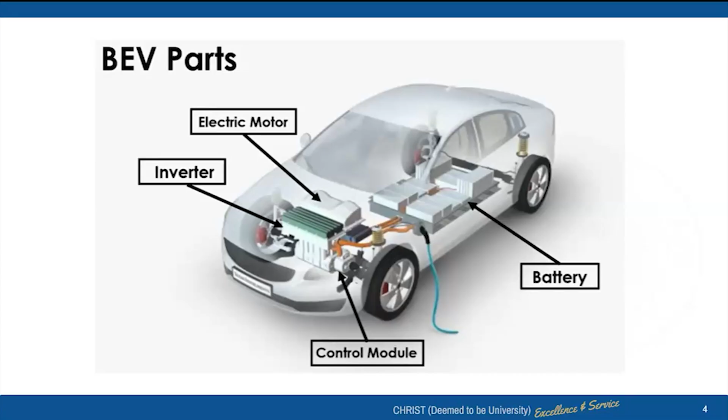Talking about the features of this normal battery electric vehicle: there is no emission, we don't depend upon any oil, it's very cost effective, low maintenance, reduced noise pollution, and very easy to drive as well.

Talking about some problems we could encounter: the recharging point scarcity, definitely, since it's newly into the market, especially in the India market. Obviously charging points need to be set up—that's one concern, though it is being installed at many places and is happening. The driving range is also less, going up to about 300 to 400 kilometers per charge, which is the maximum we know of.

The speed also has a limitation. But regarding pickup—when we talk about a petrol or diesel engine, initial pickup happens within seconds, whereas electric vehicles are much better, moving in just milliseconds. Another disadvantage is it takes a longer recharge time, and the price is also very high. So these are the vague problems we are facing right now.

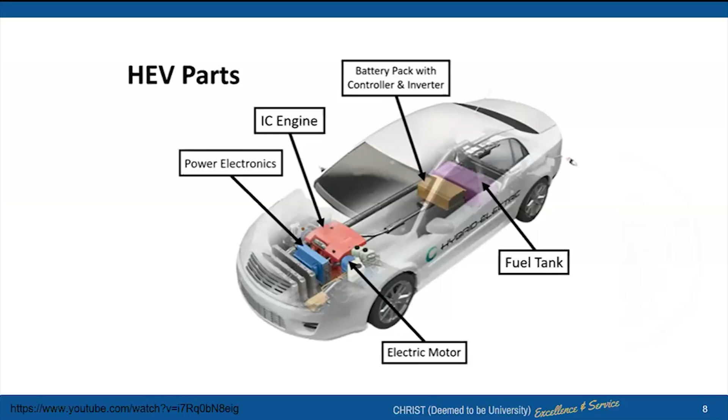So the basic components of this hybrid electric vehicle: it consists of your IC engine. You have power electronics, which maintains all the electronic signals to all the different components of the vehicle. You have a battery pack with a controller as well as the inverter, which is required to convert your AC to DC or DC to AC, and then you have the fuel tank also. So once you drain your electric power, you can go for the fuel tank, or you can have both used together, so that the efficiency could be increased.

So let us talk about the features. It is very environmentally friendly, and a regenerative braking system is there. That means whenever you apply the brake, it regenerates the energy in the form of charge, which can be stored into your battery. And there's assistance from the electric motor. It has larger ranges compared to the other vehicles, and it has a higher resale value because it consists of both components, the fuel tank as well as the electric part.

The problems that you could encounter with the hybrid electric vehicle are less power because it's a hybrid mode, it's going to be very expensive, and poor handling could happen. And even for the first version, where you don't have this hybrid part, the battery replacement is basically the actual cost of the vehicle, so replacement will definitely be very costly.

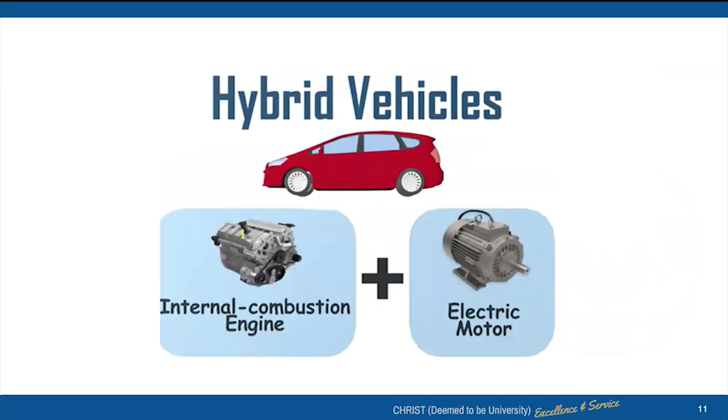So let us elaborate a little more about this hybrid vehicle. It has two parts. One is the internal combustion engine, and the second part is your electric motor. So in total, there are five components, as you can see in the diagram. You have an engine, a transmission gearbox, the generator motor, and a power control module which has the inverter as well as the converter.

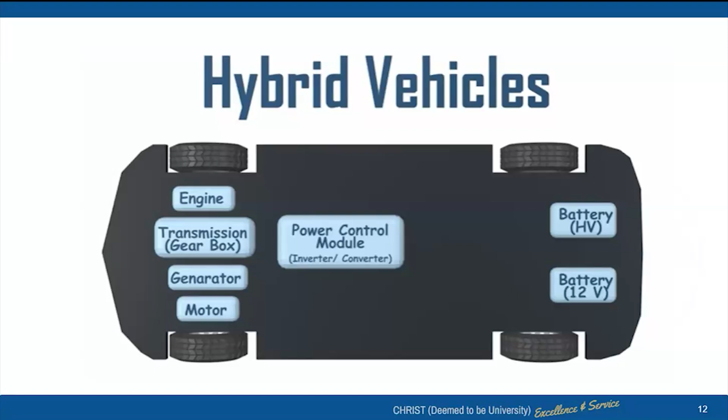And on the right side, you can see a high volt battery and a low voltage, that is a 12-volt battery. The high volt battery is basically where you store the charges, and this 12-volt battery is for supplying electricity to the smaller accessory parts of your car, not to the motor.

So if we divide this hybrid electric vehicle, we can run it through three different methods. One is the series hybrid method, the second is the parallel hybrid, and the third is series-parallel, that is the combination of these two. So let us talk one by one.

So the basic concept of this hybrid electric vehicle is you have an internal combustion engine, usually a smaller diesel or gasoline engine. By making use of the fuel, it generates the power. And with that power, the electric motor will be running. The electric motor provides the power, and it is known as the permanent magnet synchronous motor, an AC motor. It provides instant torque for smooth acceleration, and it also assists the engine.

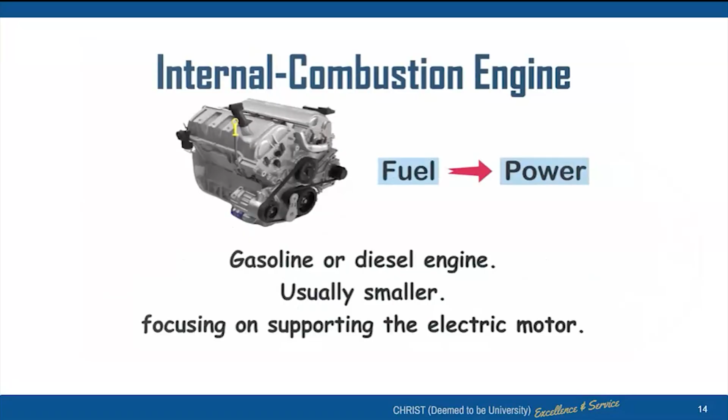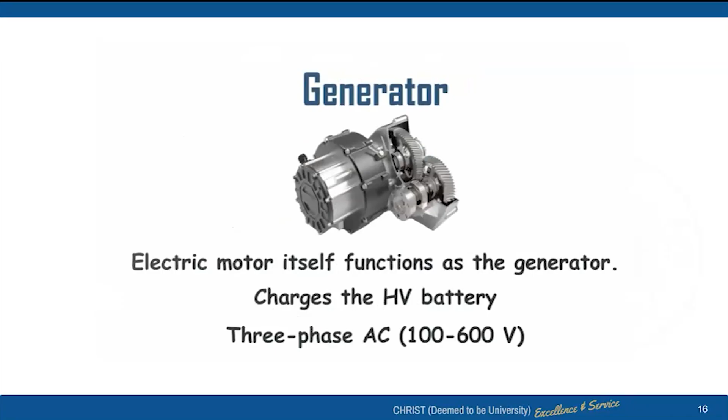So the internal combustion engine, as stated, does the role of generating the power from the fuel, and the electric motor generates the power from the battery. So here we have a generator. The electric motor functions as a generator. The charges are stored, as I mentioned, in the high volt battery, and it is three phase, and it can store charges up to, say, 100 to 600 volts.

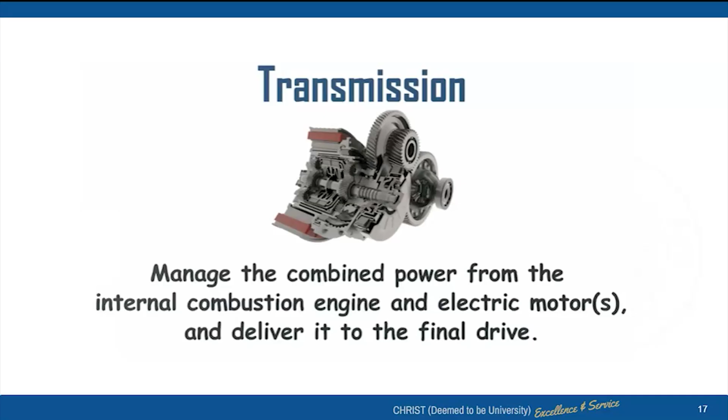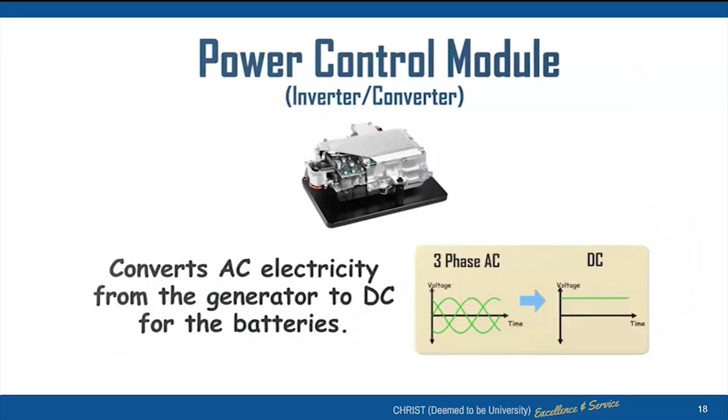And transmission is the process by which the power generated either from the fuel or the electric motor gets passed to your final drive. So it's a combined power from the internal combustion engine and the electric motor. And as we have seen in the diagram, the power control acts as an inverter or a converter. It's three phase, and it converts the AC electricity from the generator to DC, and that is for the battery.

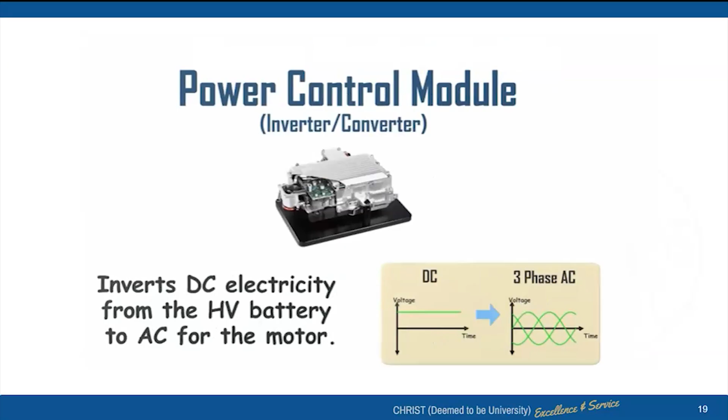And inverts the DC electricity from the HV batteries, that is your storage battery, to AC for the motor. So if you look at this, the power control module actively manages the power flow, and it controls both your engine as well as your motor together. And as I stated already, the 12 volt auxiliary battery is for lights, radios, and starting, and it is not at all involved in the main hybrid powertrain.

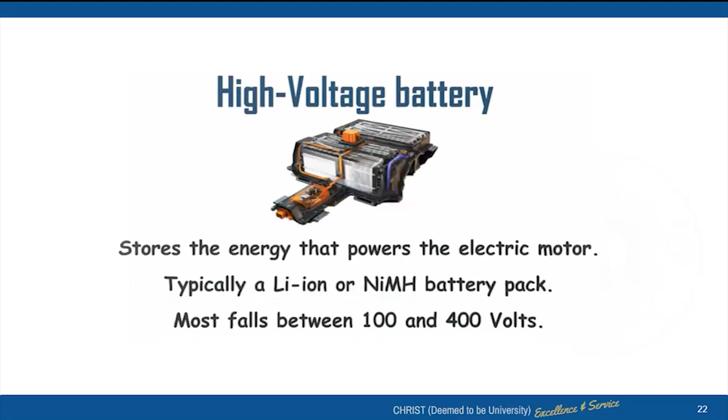And as mentioned, the high voltage battery is the storage unit, and it is typically a Li-ion or NiMH battery package. So a hybrid vehicle, which is a series, a parallel, or a series parallel, gives power to a vehicle to move in a different way.

So if you see the series, it involves the engine to supply the power to the motor, and then from the motor it is supplied to the transmission unit, that is to the gearbox, to drive the vehicle. And when we talk about the parallel, the engine and motor together supply their power to the transmission unit so the vehicle can move or drive. And the last one, which is a series parallel, you have the engine and motor together providing the power, but it is in the split way.

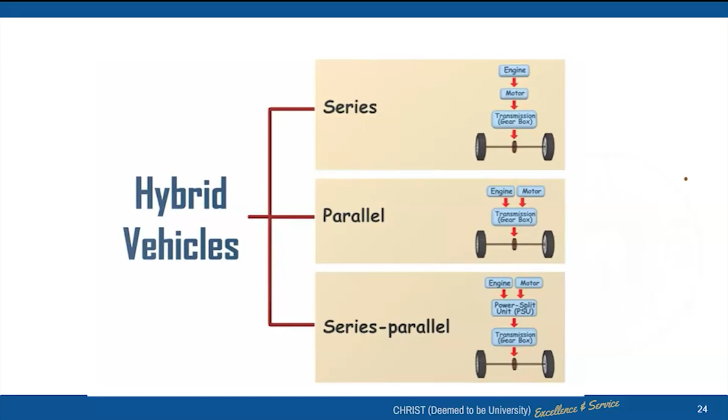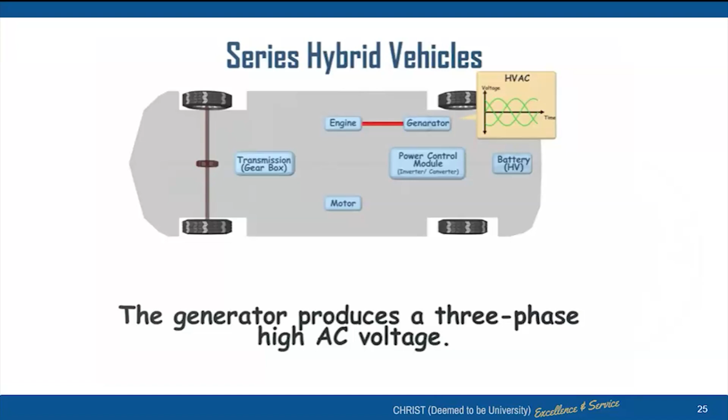So if you want to switch from one mode to another mode, from engine to motor or from motor to engine, it is possible in the series parallel hybrid vehicle. So looking a little more in depth at what is a series hybrid vehicle, you can see from the engine, the power is moving to your generator. The generator generates the power. So the generator produces a three-phase high AC voltage, and that is passed to your power control module, and from there it goes to your high voltage battery.

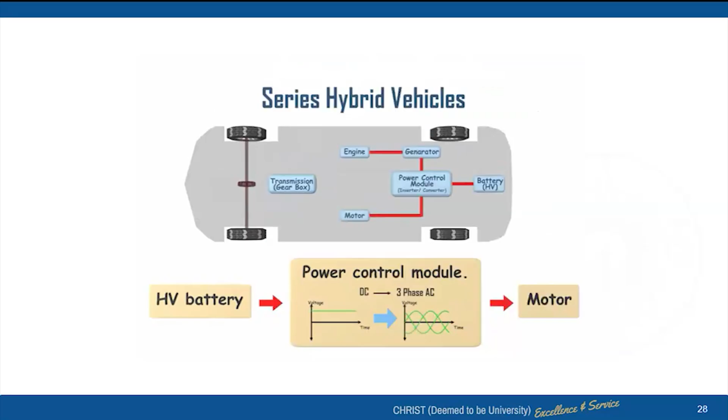And here you have the storage of your charges in the battery, both the batteries, auxiliary as well as HV batteries. Now once you have the charges in the HV battery, from the HV battery the DC goes to your power control unit. So the DC is converted into a three-phase AC, and from there it goes to your motor. Once it reaches the motor, it goes to your transmission unit, and from the transmission unit it goes to the drive, and your vehicle starts moving. So this is the simple fundamental method by which a series hybrid vehicle works.

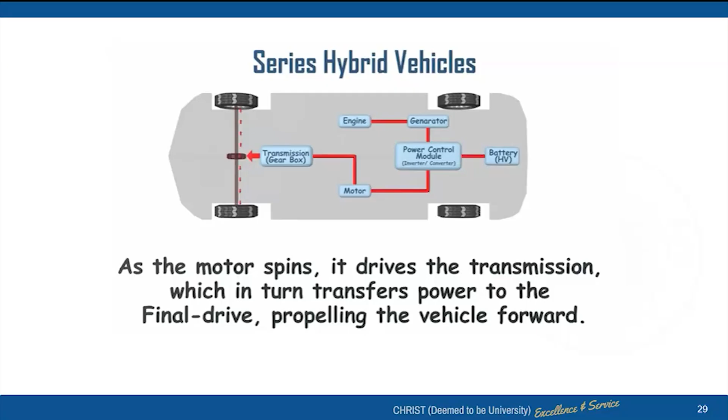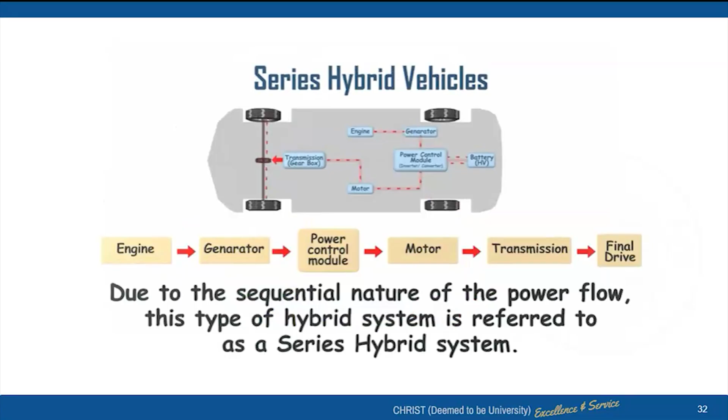So engine to generator, generator to power control, then to battery, battery to power controller, because you have an inverter and converter in the power control module. And then from there it goes to the motor, from the motor to the transmission unit, and finally it drives. So as you can see, it's a series transmission of power from the engine to your transmission unit. So, due to the sequential nature of the power flow, this type of hybrid system is referred to as a series hybrid system. Now, talking about the next one, which is known as a parallel hybrid vehicle.

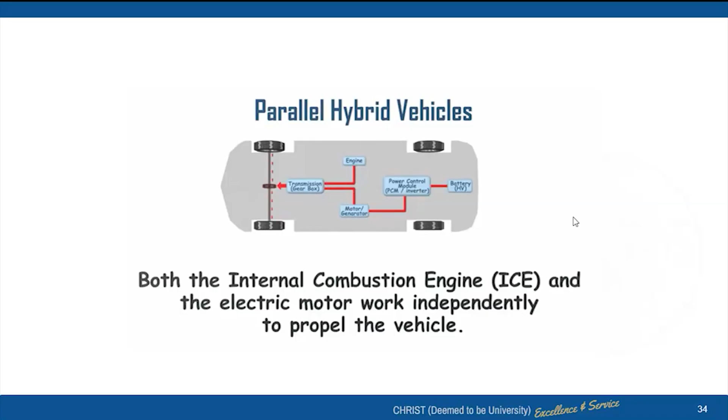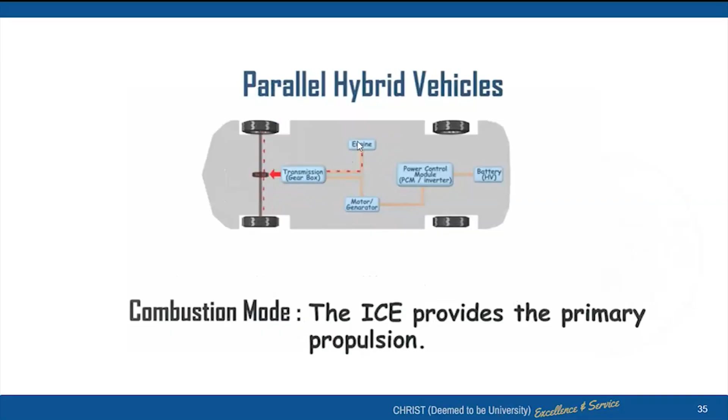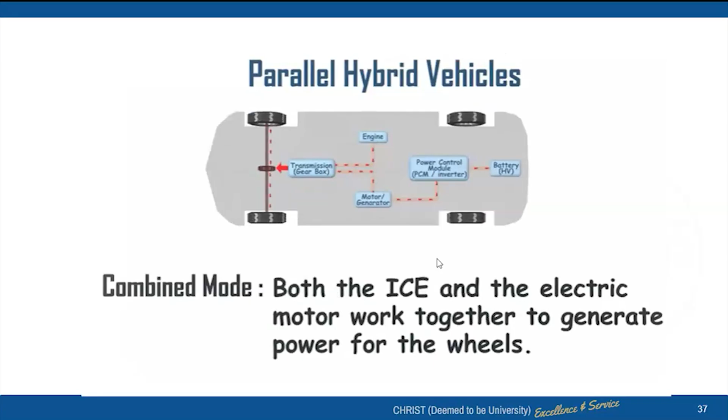Now, it has got three modes. One is the combustion mode, where the engine, the ICE, provides the primary propulsion. Then you can see the electric mode, where the vehicle operates solely on electric power. And you can see the combined mode also in a parallel hybrid vehicle, wherein both the IC engine as well as the battery come together to drive the vehicle. So the engine typically serves as the primary means of propulsion, and the electric motor acts as a backup. So once you don't have the fuel, then we make use of the battery to run the vehicle.

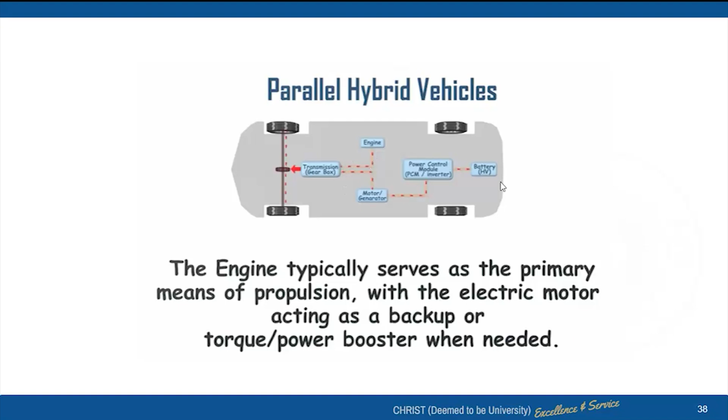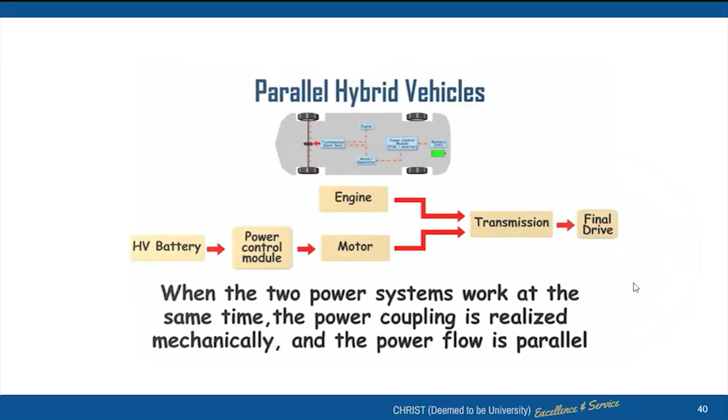Okay, now why is it known as parallel? I think it is clear to everyone that we are making use of both the engine as well as the motor. The motor makes use of the battery, and the engine makes use of the fuel, and together they transmit power to the transmission unit, and the final drive happens. That is why it is known as a parallel hybrid vehicle.

Now, talking about the series-parallel hybrid vehicle, here the engine has the capacity to transfer the output power directly to the transmission through the power split. So what is this power split? Whatever power you get from the engine, and whatever power you get from the high-voltage battery, these two are transmitted in a ratio, in a split, so as to make it more efficient.

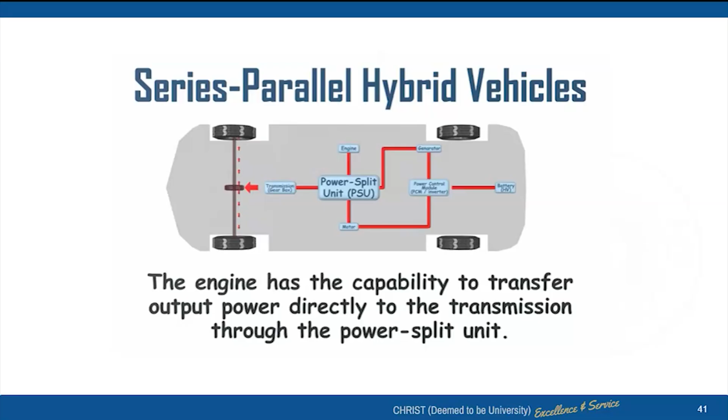You know? So it is not like you are going to use the engine full time, or that the motor is used full time. Actually, we try to make it energy efficient, and try to see if we could utilize the battery more compared to the engine, so as to make it environment friendly also.

The mechanical path directly connects the engine to the transmission. The electric path transfers the power from the electric motor to the transmission. And during operation, this happens dynamically. So here comes the concept of embedding your code or software into the power split unit, so that it can dynamically adjust the power.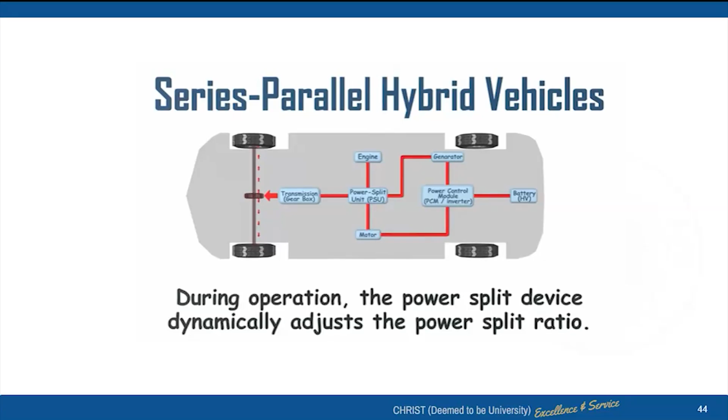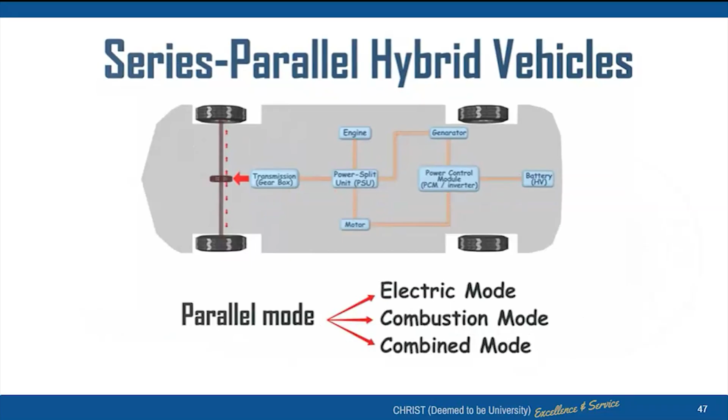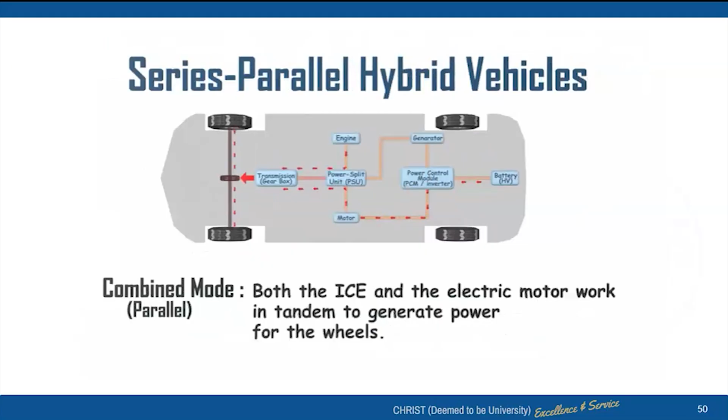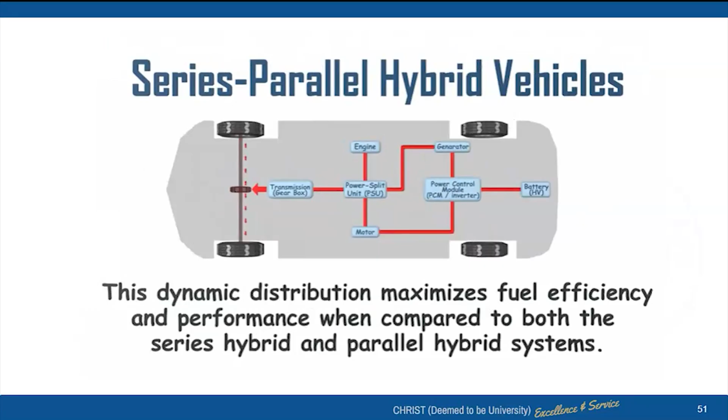In the series mode, as I already stated, energy flows from engine, generator, battery, and motor to the transmission. In parallel mode, we have the electric mode, the combustion mode, and the combined mode of these two. And so this is the combined mode. Okay. So this dynamic distribution maximizes fuel efficiency and performance compared to the series hybrid and the parallel hybrid systems.

So talking about a comparative study between these three, in series mode, the IC engine generates the power, which passes through the motor and then to the transmission unit. And the efficiency is about 50%, you can say 50-50. In the parallel, most of the time the engine is being used, and once the fuel is consumed, it makes use of the motor.

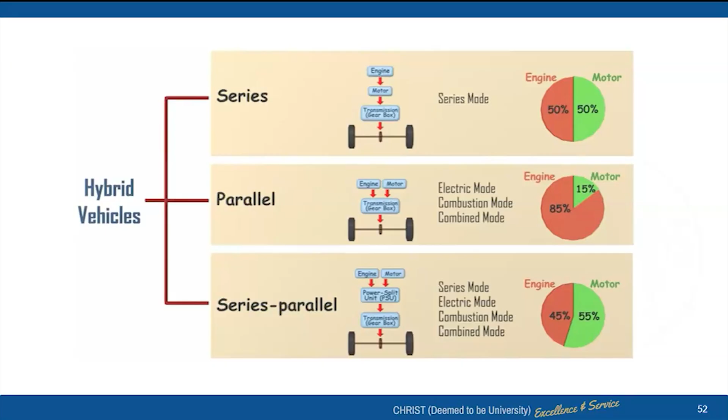To make it a little more efficient, both the series and parallel are combined. And once they are combined, the efficiency of series-parallel hybrid vehicles is much better, giving an efficiency of say 55%, more compared to series and parallel individually.

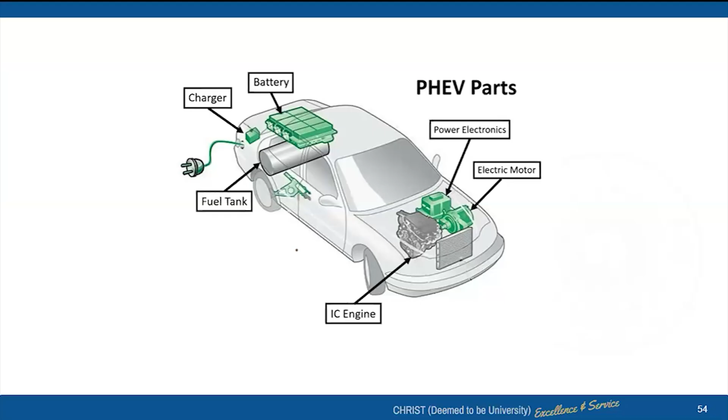Next is the plug-in hybrid electric vehicle. In this, we have the power electronics, electric motor, IC engine, fuel tank, battery, and the charger also. Here we are plugging in, charging our unit with level 1, level 2, and level 3. As the level increases, it requires more voltage to charge the vehicle. That depends upon your battery capacity and the range required.

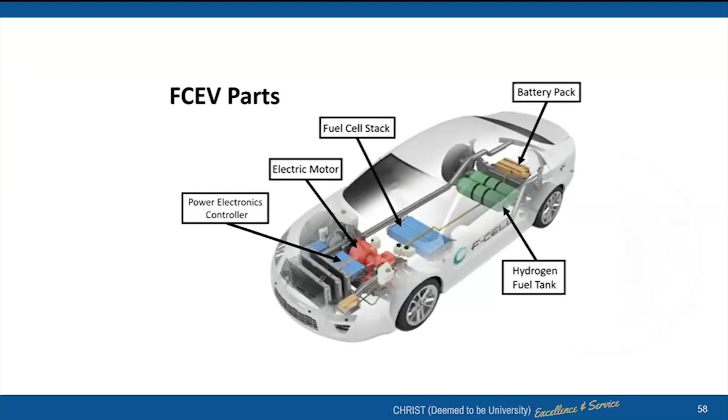Moving on to the last one, the fuel cell electric vehicle, wherein we make use of a fuel cell, that is chemical energy, which we want converted into electric form. As you can see in the diagram, we have the battery pack and the electric motor, but we also have a fuel cell stack which converts the chemical energy. Here hydrogen fuel is converted into electricity, transmitted to the electric motor through the power electronic controller, and that drives the car.

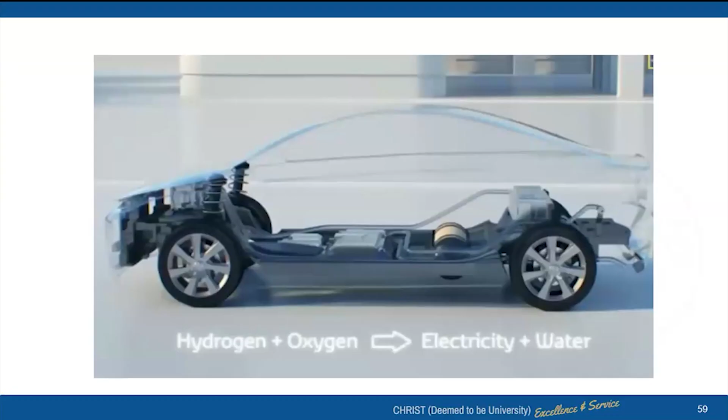So it's simple: hydrogen plus oxygen gives you electricity, which is used by the electric motor to drive the unit. We can say it is renewable and readily available. Hydrogen supports zero carbon, so zero emission, highly efficient, and fast charging time.

But the problems are like extraction of the hydrogen. So to get the hydrogen is a tedious process, and then your fuel cell basically needs quite big investments. The overall cost will definitely increase, and the major concern is storage and transportation of this hydrogen, which is very complex.

So there are four different types I explained, which are very much there in the market. You will find all the variants with different motor vehicles. But when we talk about research of an electric vehicle, it's not just about the vehicle, it's about each and every component of the vehicle. To make your vehicle very efficient, all the components that you have seen so far with this vehicle need to be researched. You have to do research on that to increase the efficiency with zero emissions.

Okay, so it also depends upon the motors. Motors are of different types, and these motors also play an important role in the efficiency of your mileage, efficiency of your emissions, efficiency of the drive, the transmission that is happening to all the tires. So it's just one component like that. Each and every component, whether the hardware units or the electronic units, and at the same time the software unit, which is software defined, we'll come to that also. So each plays an important role.

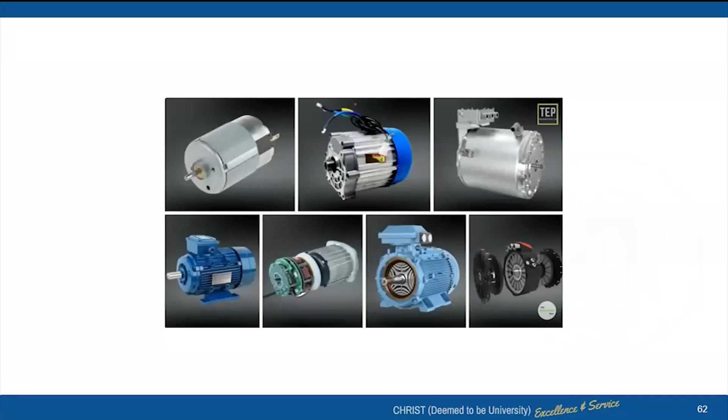Okay, but the traffic on the 50 may be less, the traffic on the 10 may be very high. So it is a dynamic situation. There are so many external factors other than the physical component factors that also affect your desired state or the outputs. So therein lies the requirement of your software defined unit in the vehicle.

So let us elaborate a little more about the various topics that we have in our M.Tech program, which started newly this year, and you will experience all of this in it. I will show you the curriculum as well as the content of the syllabus to everyone. So the first part is the software defined vehicle, as I was mentioning, the architecture. So let me just show you that architecture as well.

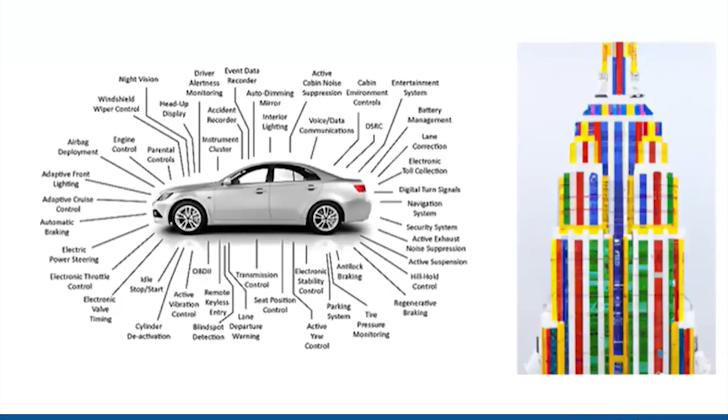Now, there are two architectures we generally use. One is the distributed architecture, and the centralized method to control the entire movement of a vehicle. But when we talk about the future, it's about a zone architecture, and a zone architecture is something which is quite scalable, reusable. I mean, you can reuse it, and it's efficient to develop. As you can see, it's a safe and redundant network, and quite a scalable platform. So only a few items we need to bother about in a vehicle, rather than bothering about each and every mechanical hardware unit in this system.

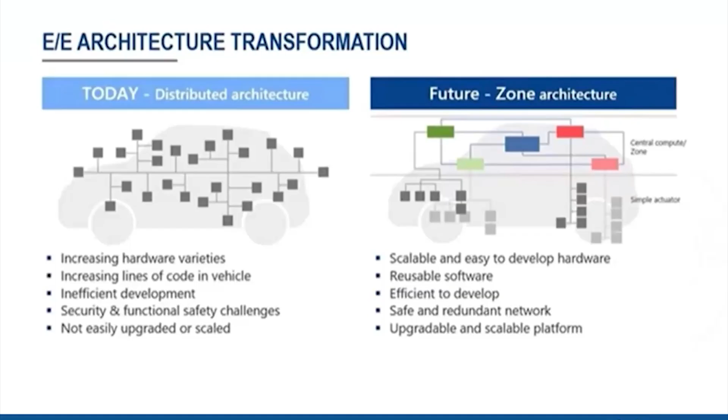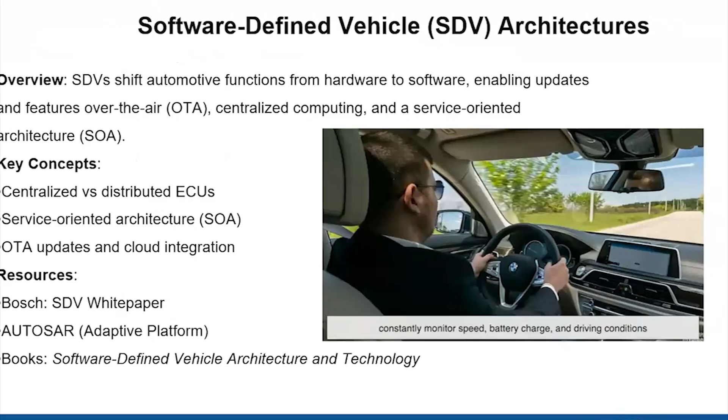So that is all about your software defined vehicle, and I'll elaborate a little more at the end with the syllabus as well. Now moving on to the development of the automotive software for the automotive system. Here we have so many, as I was mentioning, AUTOSAR. And all of us know Simulink and MATLAB, and there is functional safety, which are the key concepts for developing the software for the autonomous vehicle. And many were a little aware about the different units in terms of sensors or the networks. So there are many networks like CAN or LIN. They are the protocols, the interconnected networks, area networks, which we basically use to define our protocol to either make our system fast or in some cases a little slow comparatively.

Okay, so these are the hardware units in the embedded form in your system, which assist a driver. We call it ADAS, and obviously for these systems to work, we have this RTOS, which is a real-time operating system. So an embedded system in a vehicle with various components needs to get connected to the software unit for its function.

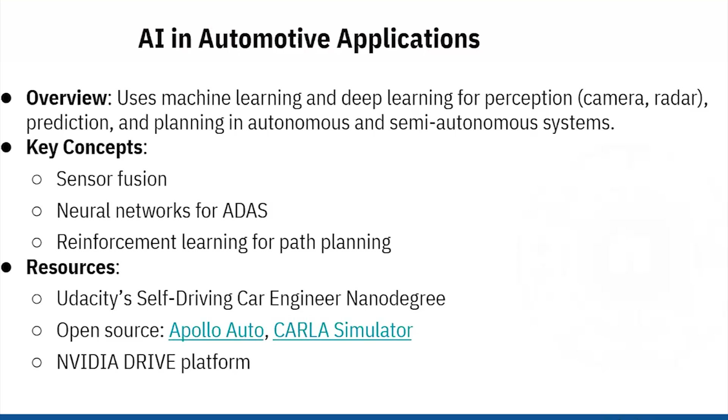Because when you are plugging into an electric grid, that electricity is being generated through various different methods, which involve emissions also. But yes, it is true that the electric vehicle itself is not giving off these emissions.

Now the most important and last thing is about security. Anything you develop, which is definitely a hardware unit, failure could happen to it for many reasons - temperature, humidity, and the lifespan of that electronic unit. At the same time, for software, it's about bugs and errors which could happen at any point. So a clean software or agile model that you build for the architecture of a vehicle needs to attend to one more important thing, the security aspects. It's not just about the bug, it's about the security aspect. Anybody could enter into your vehicle, damage your vehicle, control your vehicle, and cause accidents.

Anything can happen. Once your vehicle is connected to the internet, once it's connected to the cloud, the threat is always there. Even though we build up anything, the most important thing we need to address first, whatever we build through AI, is the security aspects. If we could do that, then definitely things will be quite positive.